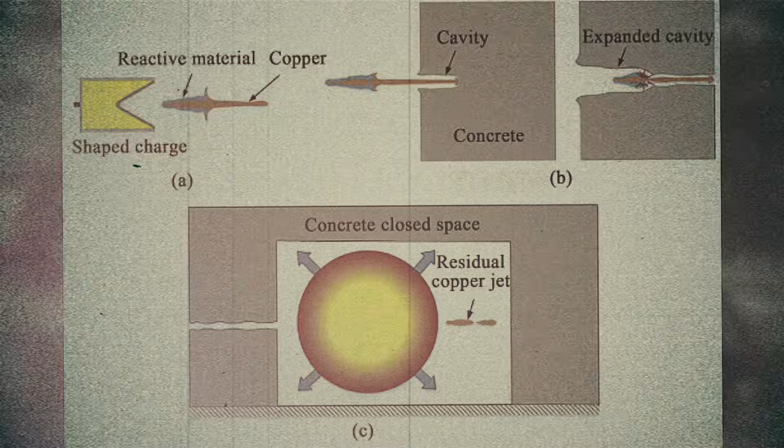The beginning of the 60s of the 20th century. The Cold War is in full swing. The Soviet Union and the United States are competing absolutely in everything. Space, aviation, navy, and, of course, tanks. By this moment, Soviet designers understand one important thing. Classic tank building is hitting a ceiling.

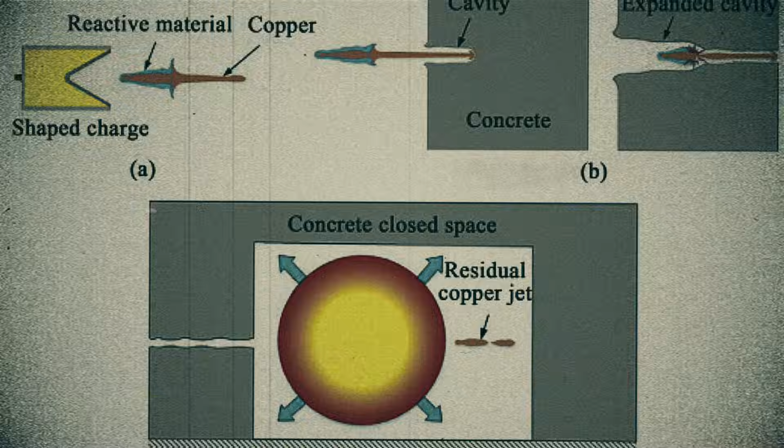Armor is becoming thicker and thicker, and ordinary tank shells are piercing it worse and worse. The calibers of guns are growing, but along with them, the recoil, the mass of the tank, and the dimensions are growing. Something fundamentally new is needed. And here an idea is born that seems ingenious. What if the tank shoots not shells, but guided missiles?

The logic is simple and convincing. A missile flies farther than a shell. A missile can be guided exactly to the target, even at a large distance. A missile with a cumulative warhead will pierce any armor regardless of the caliber of the launcher. There is no need for a huge gun with monstrous recoil. A launcher of medium caliber and a missile control system are sufficient.

The idea of a missile tank has been floating in the air for several years already. Different design bureaus are trying different approaches. Someone puts missile launchers instead of a turret, someone makes hybrid systems, but all these machines turn out either too big or too vulnerable or insufficiently universal. A tank is needed that will be small, invisible, maneuverable, but at the same time deadly dangerous.

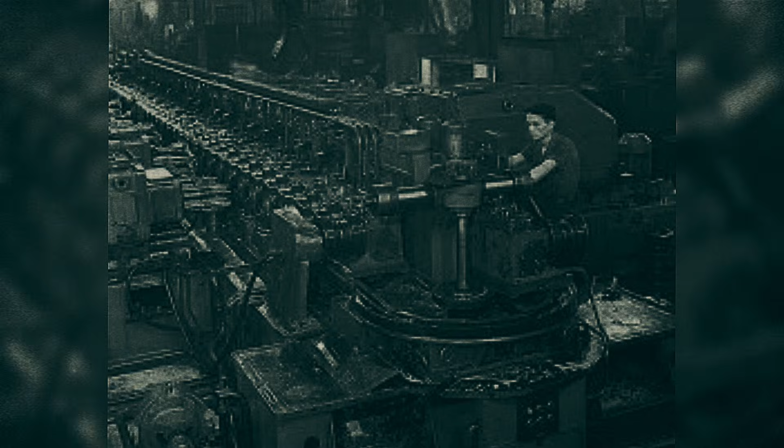In 1962, the Chelyabinsk tractor plant receives technical specifications for the development of a prospective missile tank. Pavel Pavlovich Isakov is appointed as the chief designer. The head of SKB-75 is an experienced engineer who has already managed to work on several tank projects. Now he faces a task that borders on fantasy: to create a tank of the minimum possible height with the maximum powerful missile armament, and at the same time preserve mobility, cross-country ability, and reliability.

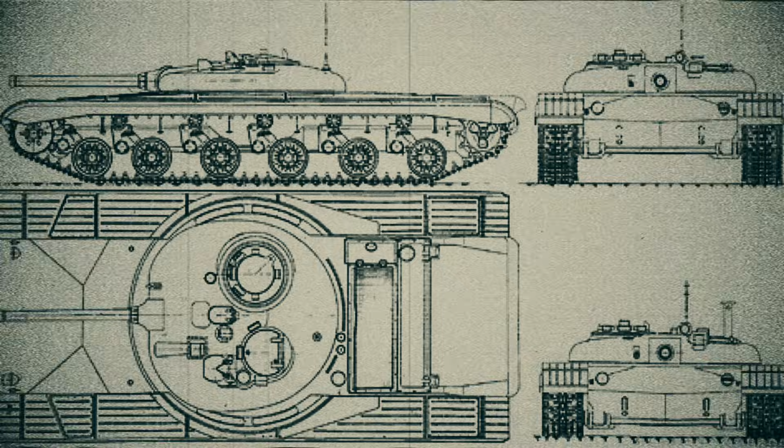The requirements are tough. The tank must be so low that it is difficult to notice and even harder to hit. It must carry guided missile armament capable of destroying any enemy tanks at long distances. It must be sufficiently fast and maneuverable to take advantageous positions and escape return fire. And all this needs to be fitted into a machine that will not cost like a spaceship, and which can be produced serially. Isakov understands that this task cannot be solved by standard methods.

Fundamentally new solutions are needed, and the first thing he starts with is the choice of the missile complex. Without it, it is impossible to move further, because the entire layout of the tank will depend on the dimensions and characteristics of the missiles.

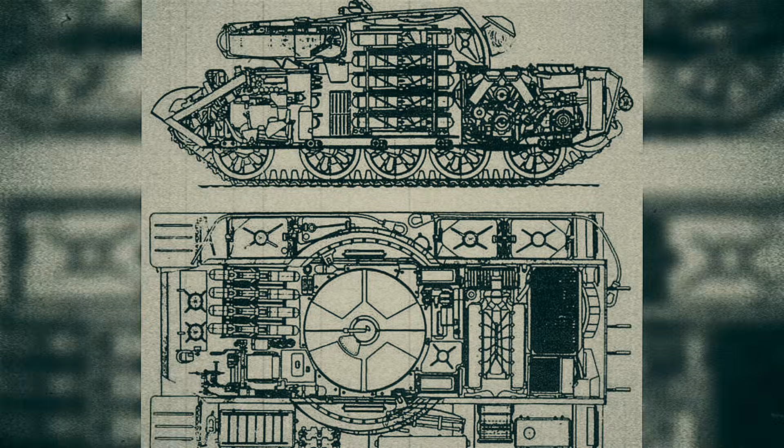On the 30th of March, 1963, a decree of the Council of Ministers of the USSR is issued. Work begins immediately on 2 missile complexes, Astra and Rubin. Both are brand new, both are promising, both are capable of solving the task of destroying armored targets at large distances. Parallel developments, tests, and comparisons of characteristics are underway. Designers calculate dimensions, weight, reliability, cost. The military looks at effectiveness, accuracy, penetrating ability.

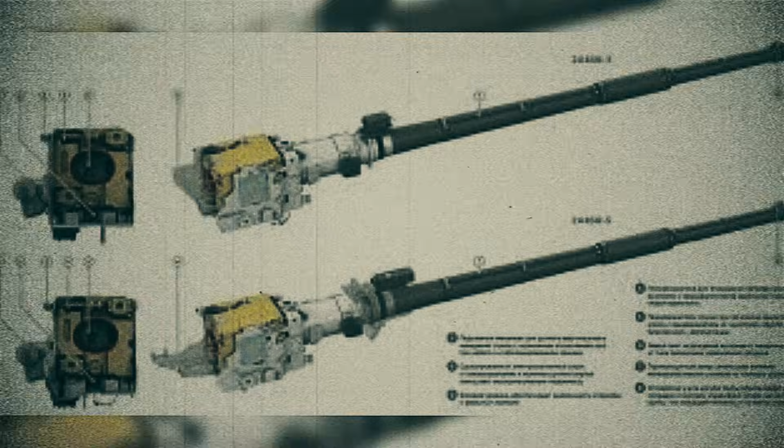On the 1st of March, 1964, a section of the Scientific Technical Council of the State Committee for Defense Technology issues a decision. Of the two complexes, Rubin wins. Work on Astra is officially stopped. Now the task is clear. It is necessary to create a tank around the Rubin missile complex. And here the most interesting part begins. Because Rubin is not a small toy that can be shoved anywhere.

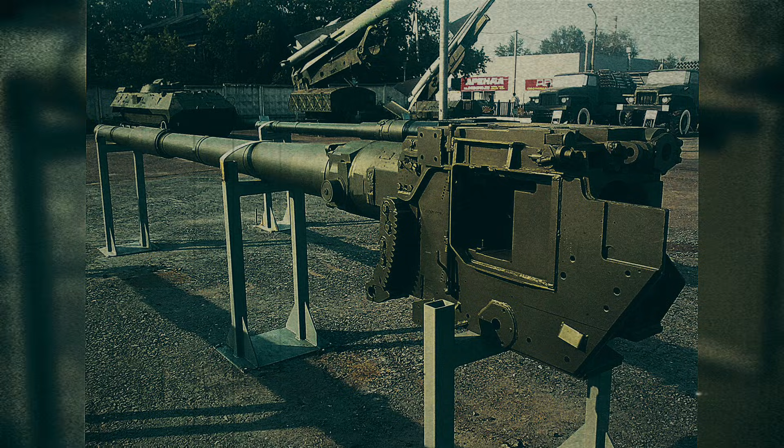The guided missile of the Rubin complex has a caliber of 125 millimeters and a length of 1,505 millimeters. That is 1.5 meters, almost human height. The cumulative warhead is capable of piercing 500 millimeters of vertically positioned steel armor. The firing range is up to 4 kilometers, which is significantly more than any tank gun of that time.

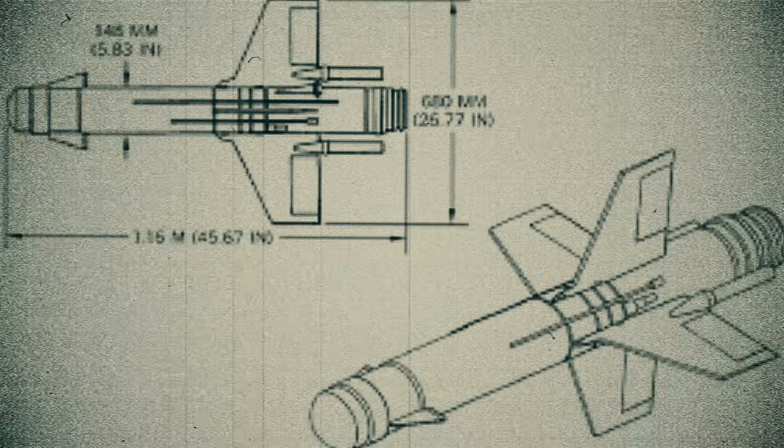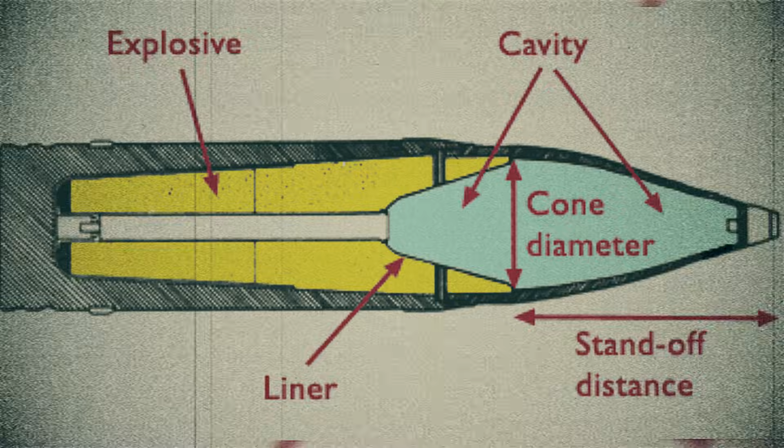But the main problem is elsewhere. The control equipment of the Rubin complex occupies a volume of 200 cubic decimeters and weighs 180 kilograms. This is like 2 healthy refrigerators. Where to shove all this into a tank if one still needs to place the crew, the ammunition rack, the engine, the transmission, the fuel tanks?

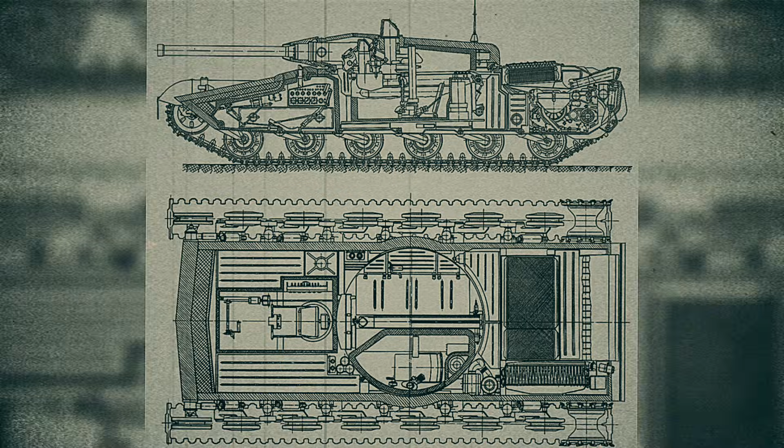How to fit 1.16-meter missiles into the ammunition rack, how to ensure their feeding to the launcher, how to protect all this complex electronics from vibrations, impacts, combat damage. Isakov starts with the main thing. It is necessary to radically reduce the internal volume of the tank. The smaller the volume, the lower the silhouette, the harder it is to hit the tank.

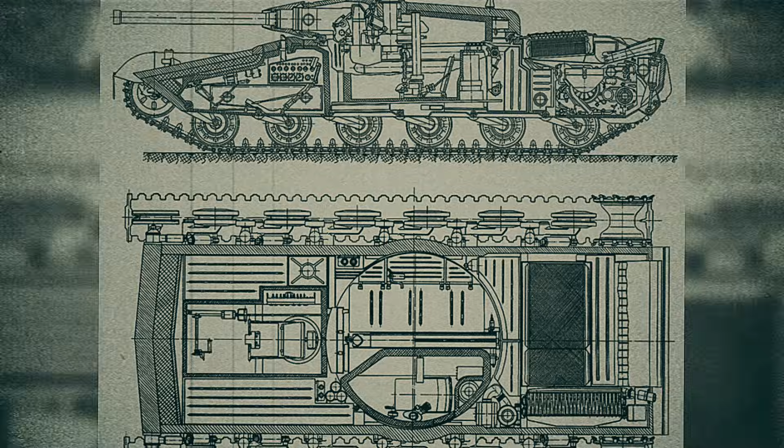The first decision, which seems insane but logical, is to reduce the crew to 2 people. Not 4, as in an ordinary tank, and not even 3. Only 2, the mechanic driver and the commander weapon operator. Automation must do everything else. There will be no loader. He will be replaced by an automatic loader that will feed missiles to the launcher.

There will be no radio operator. The radio station will be placed so that the commander can use it. There will be no gunner either. The aiming of the gun will be taken over by the commander with the help of an advanced fire control system. 2 people per tank. It sounds like science fiction, but there is simply no other way to fit all the necessary equipment.

The designers understand that there is still a lot of work ahead. It is necessary to design the launcher, develop the loading system, think through the placement of the ammunition load, create a fire control system, choose an engine and transmission, and design the chassis. And for all this, there is less than 2 years. Work is going at a frantic pace. Blueprints, calculations, mock-ups, tests of individual nodes. SKB-75 works practically around the clock.

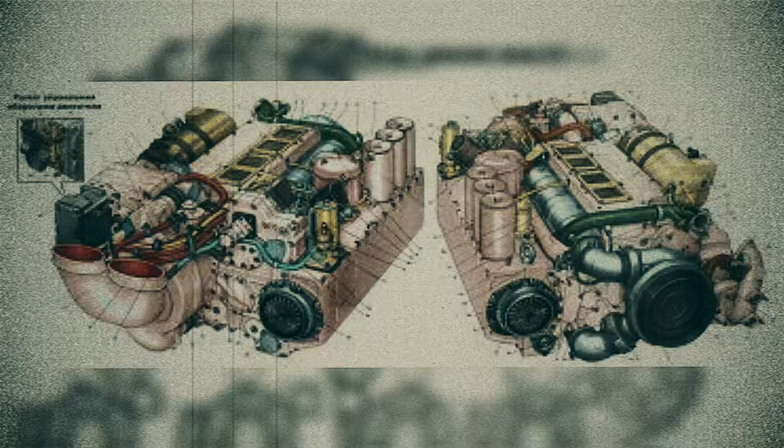By the end of 1963, the technical project is ready. The manufacturing of the first prototype begins. Metal goes into work. Assembly shops receive parts. The final stage begins. Everyone understands that they are creating something unique. A tank that is unlike anything created before. A machine which, if everything succeeds, might change the very understanding of what a tank should be.

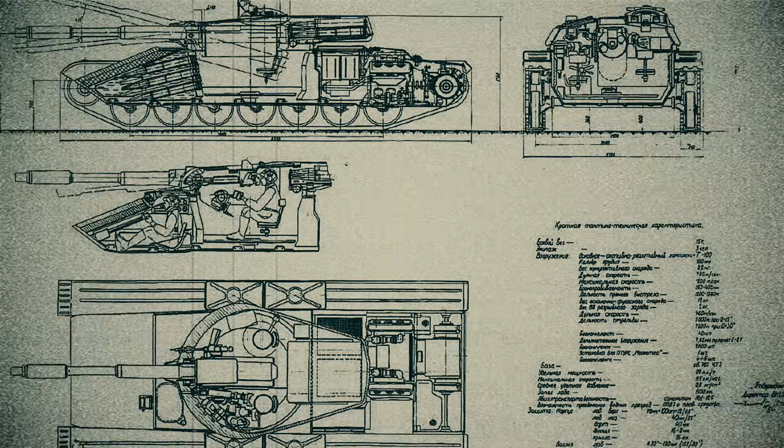1964. The assembly shop of the Chelyabinsk tractor plant. Workers are assembling a machine that many of them do not even understand. The hull is unusually wide, but at the same time, frighteningly flat. The turret looks as if it was specially flattened by a press. No familiar high elements, no protruding hatches. Everything is maximally streamlined, maximally low, maximally compact. The design that Isakov and his team came up with truly borders on engineering madness.

Let's start with the most important thing: how to place a crew of 2 people in the turret so that they can control the tank and fire simultaneously. Ordinary placement does not fit. If both sit side by side, the turret will become too wide. If one behind the other, too long. Some compromise solution is needed.

The commander is placed to the right of the gun. In front of him are the fire control panel, sighting devices, controls for the Rubin missile complex. He is responsible for searching for targets, aiming the launcher, launching missiles, controlling their flight. In fact, he performs the work of 3 people at once: the commander, the gunner, and the missile complex operator.

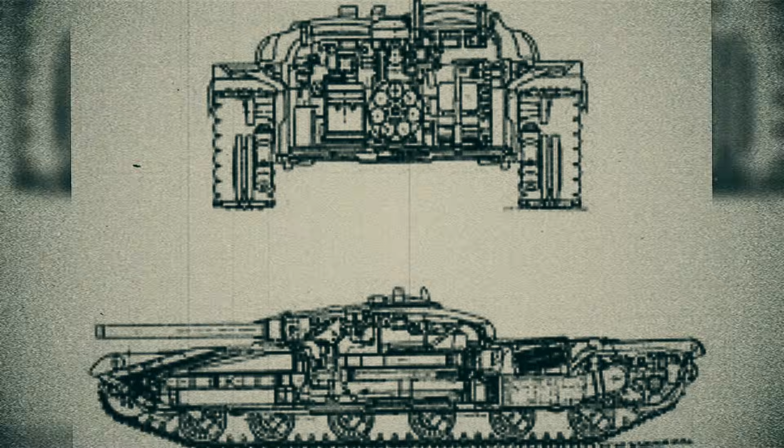The mechanic driver is placed in a small turret, and here the most interesting part begins. In an ordinary tank, the mechanic sits in the hull, looks forward, and drives the machine. The turret can rotate however it likes. This does not concern him. Here, however, the mechanic sits in the turret, and when the turret rotates, he starts to rotate along with it. They turn the turret to the right. The mechanic also looks to the right. They turned it to the left. He looks to the left. Driving a tank in such conditions is impossible.

The solution that the designers came up with looks like something out of science fiction. The mechanic driver's turret is installed in the left part of the main turret on a ball bearing. When the main turret rotates in one direction, the mechanic's turret automatically rotates in the opposite direction with the same speed. Result: the mechanic driver always looks strictly forward along the course of the tank's movement, regardless of where the main turret is turned.

Imagine the complexity of this system. 2 independent rotation mechanisms working synchronously, but in opposite directions. The slightest failure and the mechanic will end up turned to who knows where, losing orientation in space. But there is simply no other way to place him in the turret and preserve the ability to control the tank.

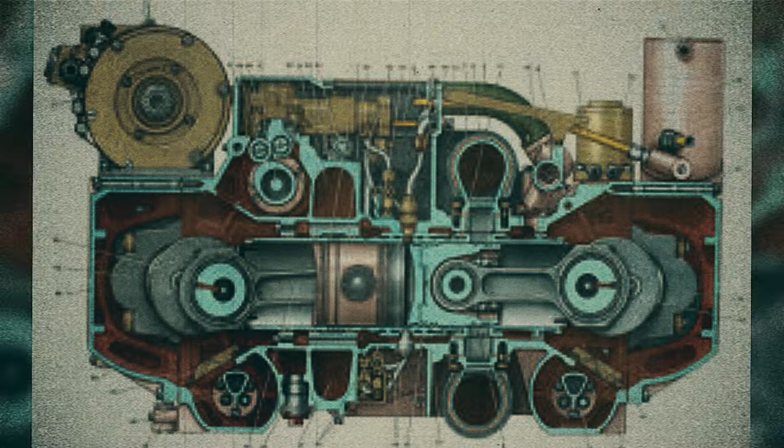By the middle of 1964, the first prototype is assembled. The machine stands in the shop and, even against the background of other tanks, looks alien. A wide, low hull, a flattened turret, a short barrel of the launcher, a minimum of protruding elements. It truly looks like a tank of the future. The question is only one: will the tank itself have a future?

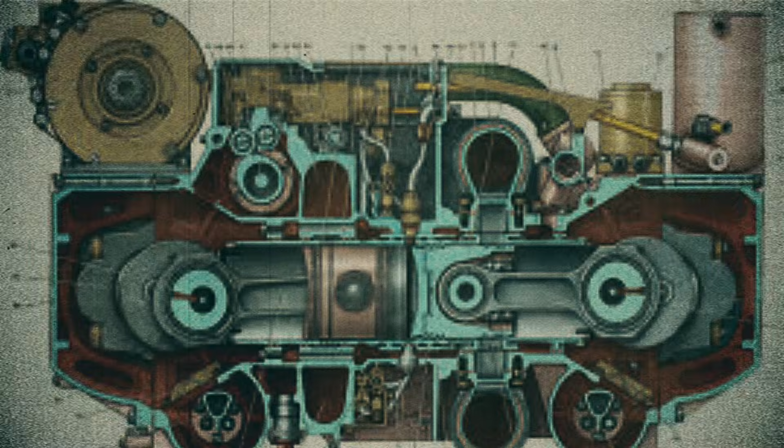Summer of 1964. Object 775 is taken out to the testing ground. For the first time, the tank drives out of the factory gates and immediately attracts the attention of everyone who sees it. The appearance really impresses even the military who have seen it all. The tank looks like an alien from the future. A flattened turret, a wide hull, almost complete absence of high elements. The silhouette is so low that it is easy to hide it behind a small mound.

The designers are worried. 2 years of work, countless calculations, blueprints, tests of individual nodes. Now, all this has turned into a real machine that must prove that revolutionary ideas work not only on paper. The military commission is skeptical. Too many new solutions, too many deviations from the classic scheme. But it is too early to judge yet. One must look at the results.

Field trials begin. The engine, 5TDF, with a power of 700 horsepower, starts without problems. The tank moves from the spot, and it is immediately visible that everything is in order with mobility. On the highway, the machine accelerates up to 70 kilometers per hour. For a 38-ton tank with such a low silhouette, this is an excellent indicator. Acceleration is smooth, steering is responsive, the engine runs evenly.

The hydropneumatic suspension works as intended. The tank can really change ground clearance. Pressed a lever, the machine squatted, became even lower. One more movement. The tank rose, increasing the clearance. It looks unusual, even fantastic. A tank that knows how to squat. On the testing ground, such machines have not been seen yet.